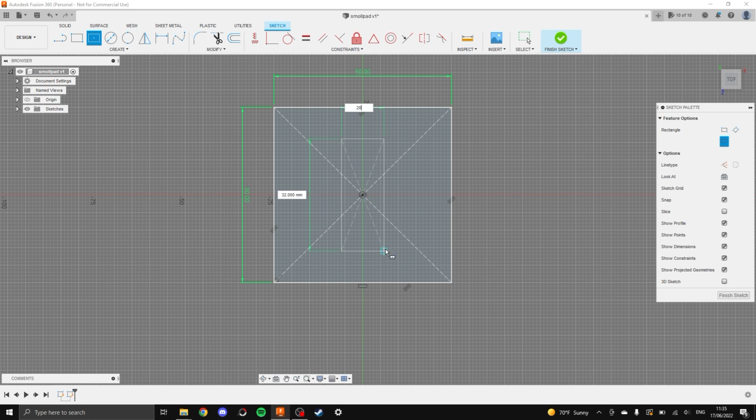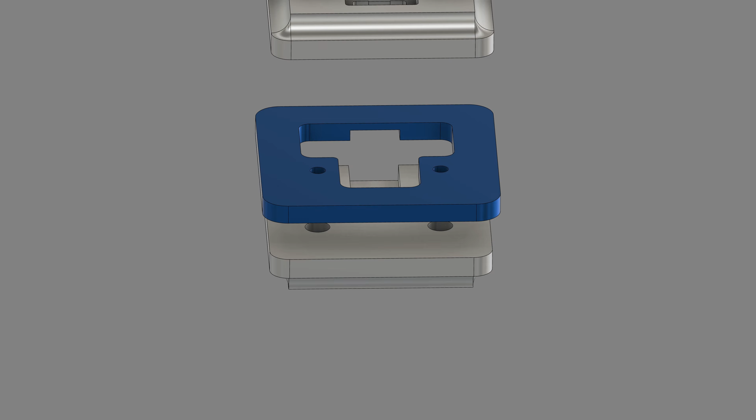So I ended up with this. It is a 3-part case with a bottom, which has a cutout for the USB-C connector and 2 smaller pockets for some screw inserts. A middle, which will house the PCB and will be made out of solid brass, a channel first, and the top, which will hold the switches.

I'm really happy with this design. While it's not the heart shape of the original, I think it has a really nice, almost Art Deco feel to it.

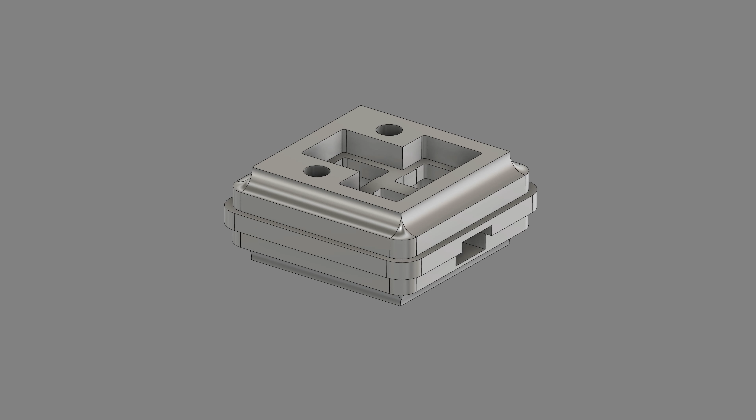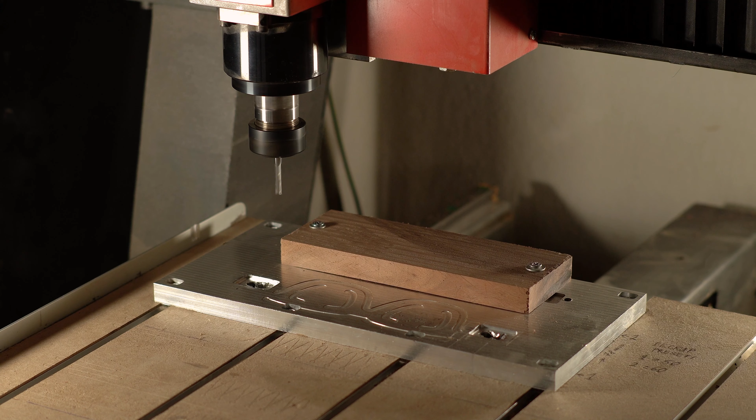So with the design finished, and the toolpath set up, which this time around were a bit more tricky since I had to machine 2 sides instead of just one, it was time for the CNC. I mounted the blank to a fixture on the CNC, and cut the first side with a 6mm bit, which is where the USB-C connector and screw inserts are.

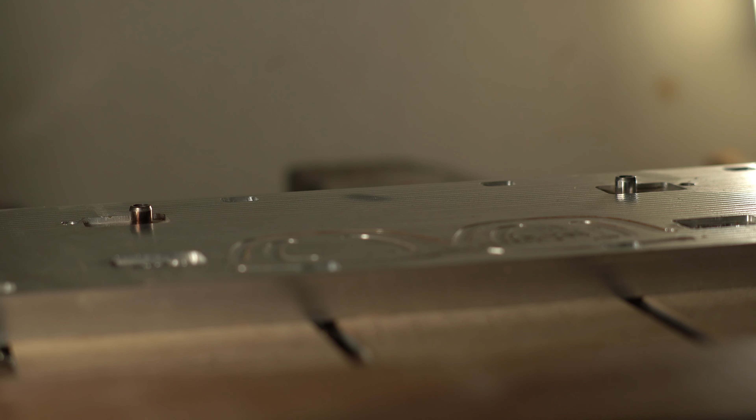Then, once that was done, I unscrewed the blank, added some painter's tape to the fixture and the wood, and joined them both with some super glue. After that, I had to clear some space off the top, since the wood blank we had was much larger than the actual pieces.

Then, cutting in the space for the switches, screw heads, and cutting the outer contour.

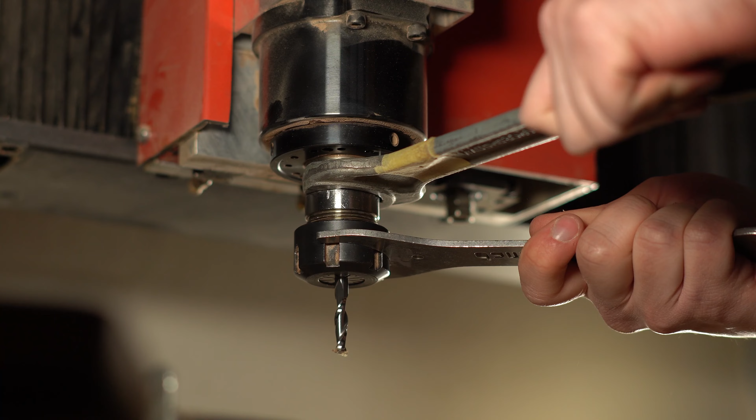And now it was time for a tool change. To get those perfect rounded edges, I decided to use an 8mm ball bit, which, as the name suggests, has a ball-shaped end.

With that done, all that was left was to use a 2mm bit to make the holes for the screws and cut in the corners to get a sharper fit.

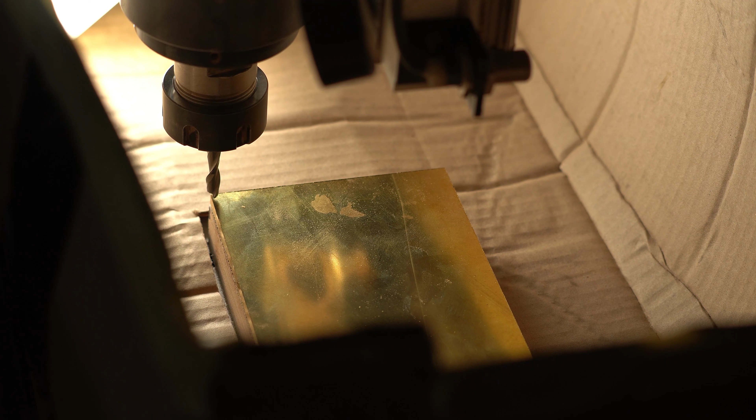Moving on now to the brass, which was a first for me and this channel. I got a piece of 5mm thick machining brass and mounted it to the CNC with the same tape method I used for the wood. I also put a cardboard box around the whole operation, since this machine isn't really set up for metal work, and brass chips are like tiny needles that will make your life a whole lot more painful.

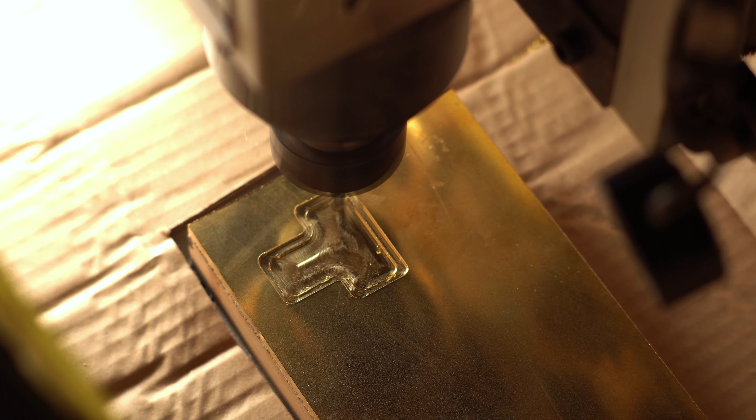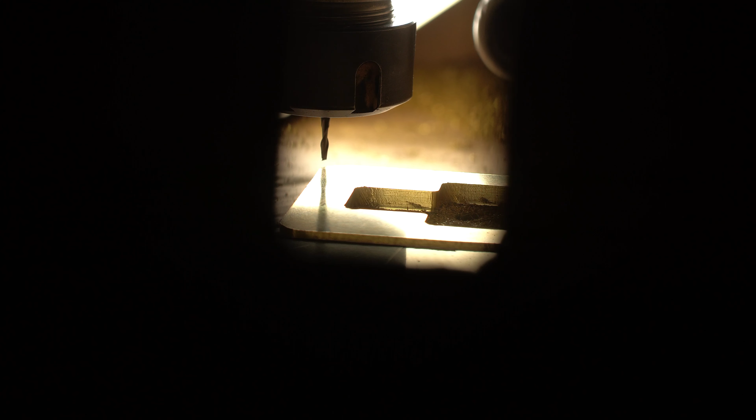So, using the same 6mm carbide bit with very small cuts, I let the machine do its work. Starting with the space for the PCB, then cutting a space for the outer USB connector, the outer contour, and finally switching to a 2mm bit to make the holes for the screws.

Now, all was going well when we ran into an issue. I knew this was a possible concern from the start, but what had happened is that the brass heated up so much because of all the cutting that at the very last step, which was cutting the holes for the screws, the adhesive melted and the piece got loose. Luckily, the piece didn't get ruined. I just had to use a drill to make the hole a little bit wider, and that was it.

So, with all of the parts finally cut, I got to sanding. Starting with the wood pieces, with some 600 grit sandpaper, and working my way up to 1000. Once they were nice and smooth, I added some linseed oil, which is my preferred finish.

Putting the wood parts aside for now, I could start work on the brass piece. I started with some 800 grit wet dry sandpaper and added some water, since that keeps the dust out of the air and helps the paper last longer, slowly increasing the grits until I reached 2000.

After which, I used the buffing wheel with some polishing paste to give the piece a nice shine, which was actually quite difficult to find since I was traveling, but in the end it all worked out. Then I used some slightly less aggressive polishing compound and a microfiber cloth to give the piece a nice final polish. I did the same for the two brass screws, sanding them up to 2000 grit and giving them a quick polish.

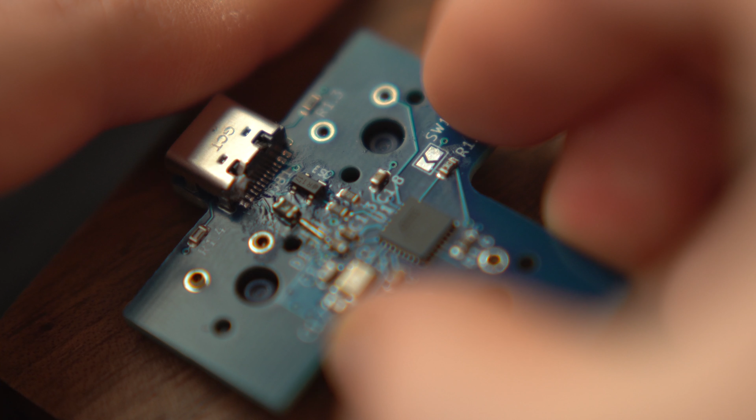Let's get to the PCB. It arrived in just a couple of days, and I decided again to use some Mill-Max sockets to make it hot swappable. So I installed all of the sockets onto the switches and soldered them into place.

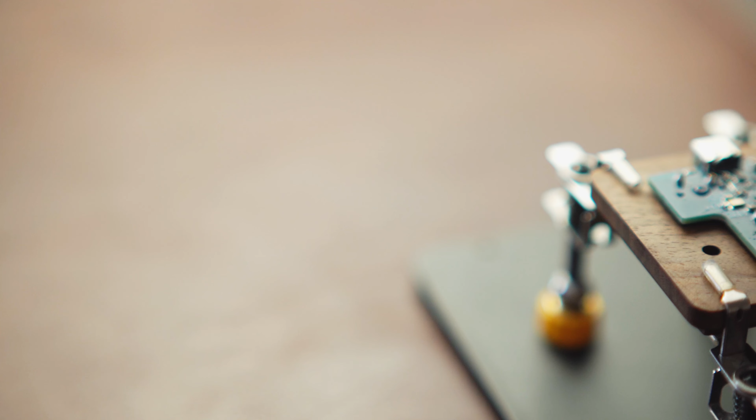So that's all of the work done on the electronic side, and I had just one more thing to do on the case, which were the screw inserts in the bottom part.

Now here I messed up again. The holes were too big and the inserts would just fall out instead of screwing into the wood. So a couple drops of super glue onto the sides and I could screw them into place, knowing that they wouldn't fall out.

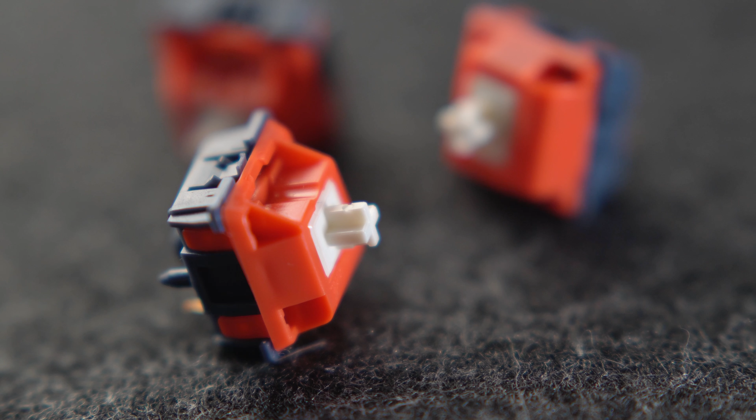So, before I get to the final assembly, let me just quickly mention the switches and keycaps I used, which are the Keywerk X Pushy, a channel favorite by now I'm sure, and some dummy key white on black double shot ABS keycaps.

I am going to leave you now for the montage.